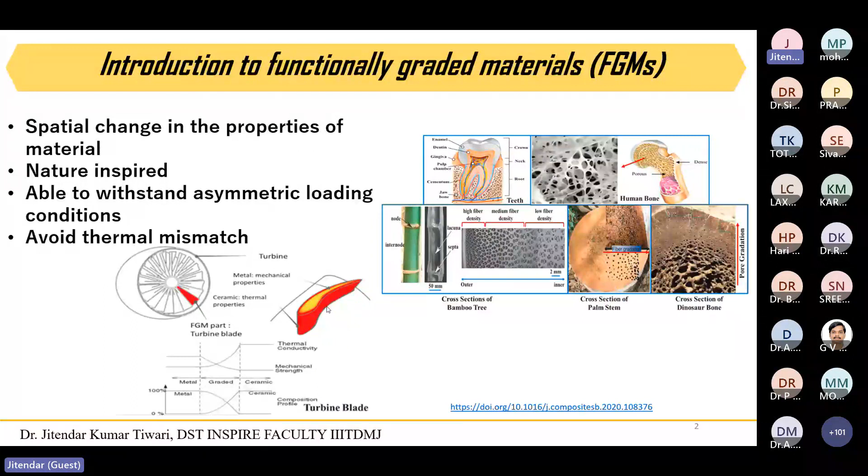Inside, most of the time, Inconel is very famous for turbine blades, and in the outer region we can add some kind of thermal barrier coating. Usually people use yttria-stabilized zirconia, which is very famous for thermal barrier coatings. So the thing is, how can we achieve the functional gradation in the case of the additive manufacturing process?

So that is very interesting as well as challenging for the research community. So there are three types of gradation we can achieve. The first one is porosity gradation, the second one is microstructure gradation, and the third one is composition gradation. So one by one I would like to discuss these in detail.

So these whole results which you are seeing are our work. We are working on all three types of gradation. So in the first case, if you see, in this direction the porosity is increasing. There are two types of porosity we can introduce. One is the design porosity.

So in our CAD model, as a micro lattice structure or any kind of design, we can modify, and we can even make closed cell porous structures, open cell porous structures, or partially closed or open. This kind of structure we can make with the help of CAD software, and then we can print it. But if we talk about the powder bed fusion process, if you print a closed cell structure, obviously the powder will get entrapped inside those pores. So laser powder bed fusion will not be feasible in that case. So that is also challenging.

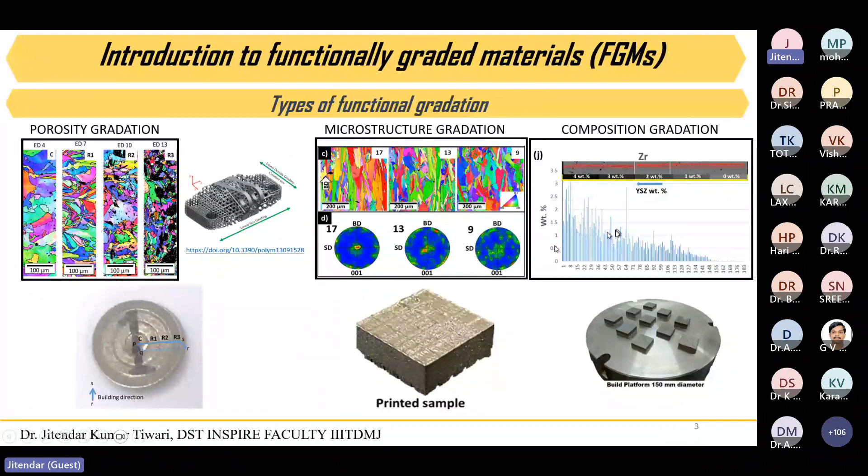So just one thing I would like to mention, most of the people are maybe not aware about that process. Apart from these processes, there is another process called electrochemical additive manufacturing. So additive manufacturing is nothing but the layer by layer guided deposition of the materials to make a 3D part. As of now, there are 7 fundamental AM processes, and they are categorized based on the amount of energy required for the fusion of the material.

But another one is electrochemical additive manufacturing. It's a very new process, and very few people are aware. At least very few groups are working in that direction. It's basically the electroplating process, but in case of electroplating, it's not guided material deposition. But in electrochemical additive manufacturing, this electroplating process is guided in such a way that we can create any kind of 2D design.

If you give it the CAD file, it can deposit the material, and maybe in 3 dimensions we can also deposit. But this process is quite slow. It's a very slow process. So one group at CSIR AMPRI Bhopal, Dr. Surender and Dr. N. Satish. Dr. N. Satish is my PhD supervisor. He was working on that when I was doing my PhD there. They started this particular work, and right now it is taking shape, and we are able to print a few bigger structures with that technique.

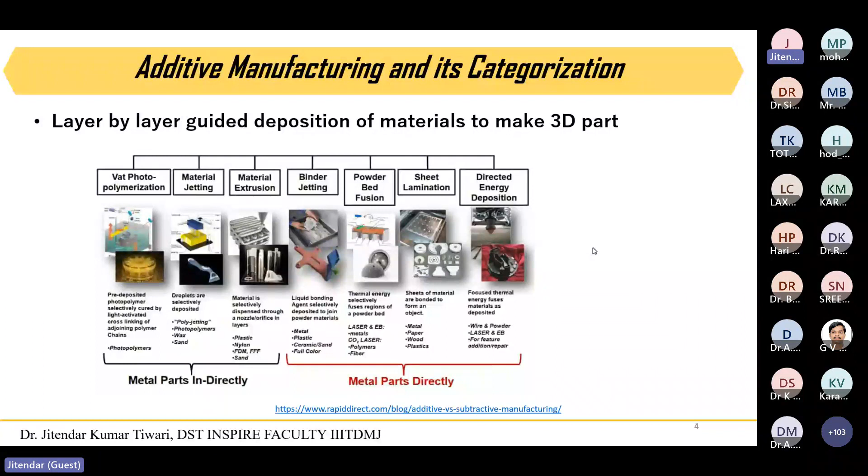So apart from this, I would like to mention the ice 3D printing process also. I think one group in IIT Bombay is working on cryogenic printing and manufacturing. That is also a new type of AM process. Laser powder bed fusion, everybody is already aware of this process, so I will not go into detail. I will just come back to how we can utilize this process to develop innovative or engineered microstructure.

So this is basically the functionally graded Inconel 718, and this is not actually straightforward. We cannot say it's functionally graded, but it is actually engineered microstructure with the help of an element-based approach. So let's say you have a part, and that part is experiencing different kinds of loading at different locations. This element-based approach can help to develop a microstructure based on your requirements.

As in my previous slides, I already mentioned this sample. I would like to briefly explain how we printed it. We make one matrix containing 5 values of laser power and scanning speed, and based on this combination we are able to calculate the laser energy density. In this direction LED is almost constant, and in this diagonal, the laser energy density is increasing.

So Dr. Pradeep, if there is any interruption from my side, please just call or stop me there. I hope everything is going well. Can you please confirm? Hello. Anyone please confirm that everything is going well? Yes, sir. Hello, sir. I can hear you. Okay. So my voice and everything is going well? Yes, sir. It's audible. Okay. Fine.

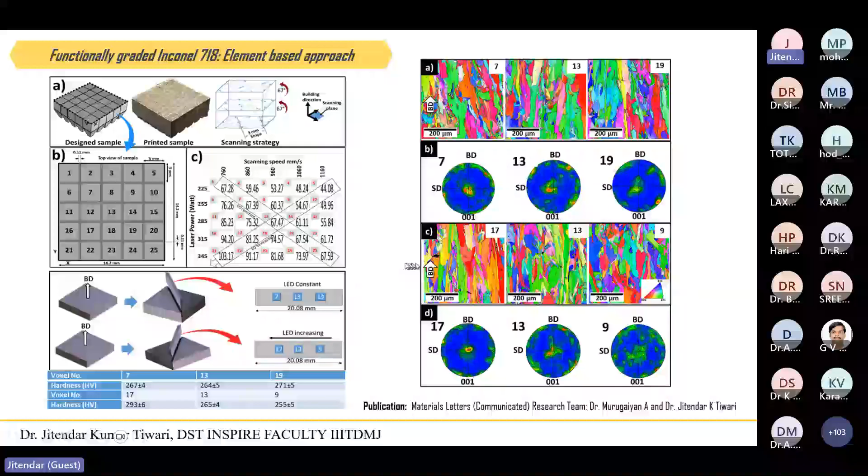Anyways, so just come back to this work. So why this work I'm planning to do, why it's still going on, a lot of investigation, and I'm trying to extend this work at the... we had tried with the powder bed fusion process. A few people have done this kind of work with directed energy deposition. Obviously, directed energy deposition is a very suitable process for functionally graded material, because you have a lot of freedom to supply the material there in powder form or in wire form.

Okay, but we had tried with the powder bed fusion, because in case of powder bed fusion, the melting happens in a very small region. If you talk about the melt pool size in case of the LPBF process, it's around, I would say, 100 micron or 150 micron. In that range you can get the melt pool size. So there the problem of agglomeration is always there.

But here we can avoid these kinds of problems, because everything is in moving condition. So some bounce back phenomena can happen, and your reinforcement could not be properly distributed inside the matrix material. So these kinds of problems are associated with the LDED process. So that's why we should choose LPBF, and we should try some innovative work with LPBF. Still, in India no commercial machine is available for functionally graded material development using LPBF.

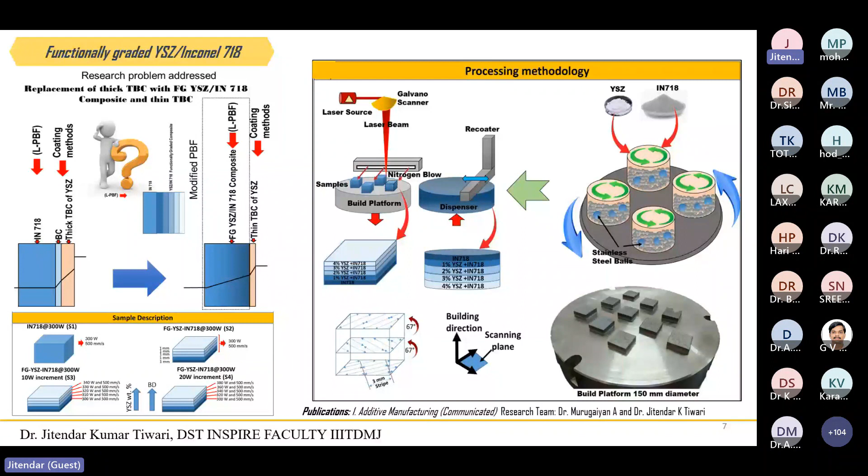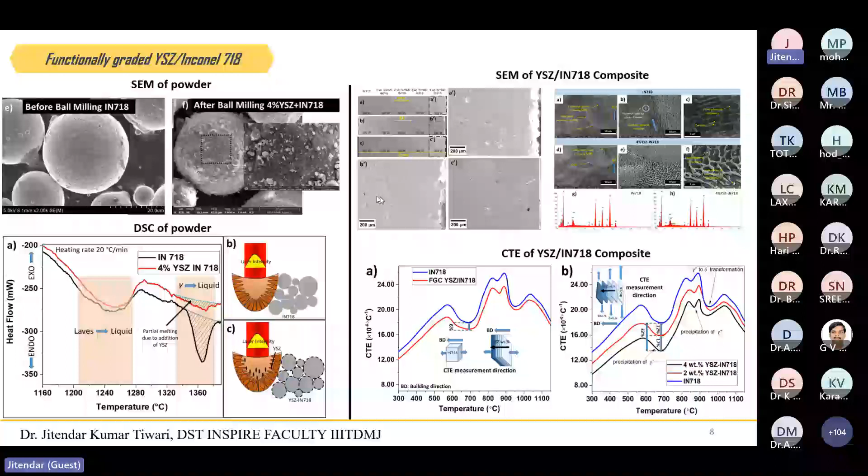So graded porosity case, the second one. Like I mentioned already in the initial slides, there are 3 types of pores. So lack of fusion pores, if you have less energy density, and once you increase it, obviously evaporation pressure will be developed above the melt pool, and that can result in keyhole porosity. In general, the shape of keyhole porosity is spherical.

So that can be useful in one sense, but obviously you are increasing the energy density, you are spending a lot of energy there. That will be costly if you want to make any kind of consolidated porosity. But for dedicated applications, we can target this, no problem with that. So I hope you understood how we have achieved this kind of consolidation in porosity.

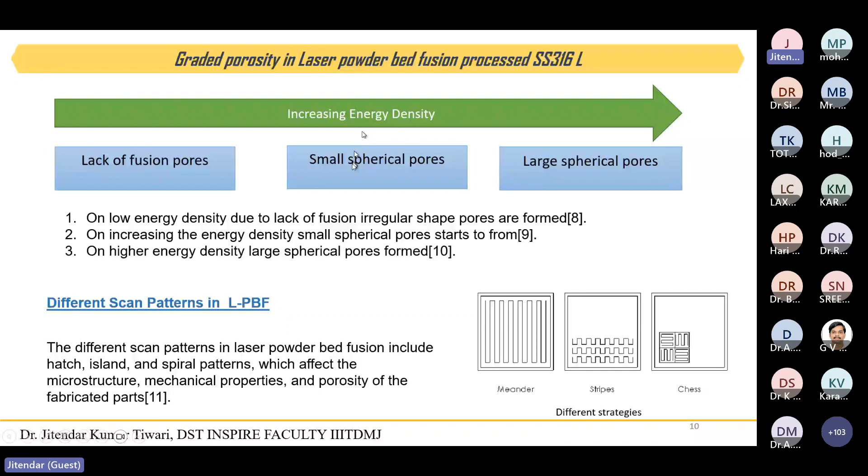Why I'm targeting this particular thing: in LPBF, if you want to make closed cell pores, it's impossible, because during closed cell printing, let's say we are printing a closed sphere, once you print it, the whole powder will get entrapped inside that sphere. That is the problem. So to avoid that problem, we can utilize these spherical pores or keyhole pores as porosity, and we can achieve functionally graded porosity.

So again, it will be some kind of parametric investigation you need to do, and you have to identify at what energy density combination how much porosity you are achieving, and that's how you can play with the parameters and plan your experiment according to your need. So these particular things also can be extended.

So you can see these are the concentric discs. Each disc is printed at different parameters which have been selected with this process parameter window. So that is also a very novel experiment, and I think very few people have performed this kind of experiment till now, and maybe in future we can target the extended version of it. Okay, so some of the results are here. Anybody want to discuss more about this work? Maybe later on we can catch up.

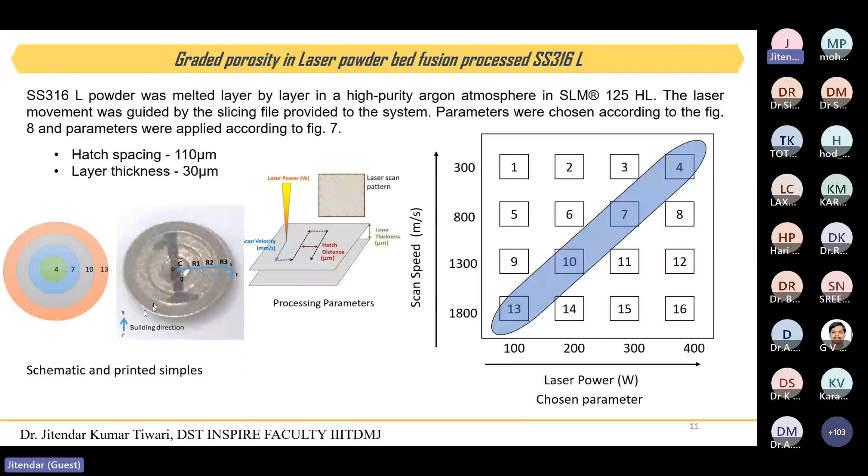So again, the problem I was mentioning again and again is how you are going to enable the laser powder bed fusion process for consolidated materials. Currently there are two types of powder supply systems in the market. One is gravity based supply. Renishaw is using this kind of system, and I think other machines like EOS also have similar things. I'm not sure, but Renishaw has this gravity based powder supply system, and then there is dispenser based supply.

So this iFusion SF1 from Intech, sorry, uses this dispenser based supply. Intech collaborated with DMG Mori, and they have developed a very nice system. I was in charge of that system in IIT Madras, and I have used it extensively for larger components as well as small scale components and innovative material design. So I found that system is quite good.

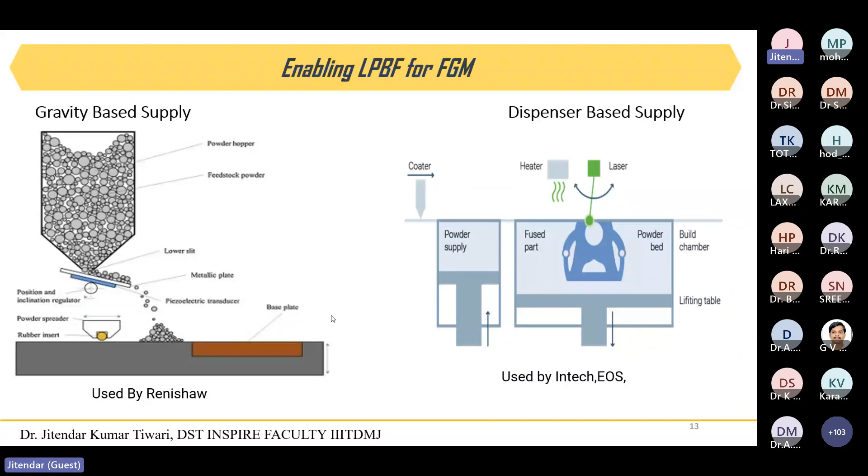So these two kinds of powder supply systems are already there, but are they going to solve this problem for the development of consolidated materials? No. So that's why we need some kind of innovation and thought process here. And still, it's very challenging even to develop this normal powder supply system. At Intech, I saw they're very hardworking, and getting to that level is itself a challenging task. But maybe in future you can think in that direction. We can expect some updates on the LPBF system from Intech.

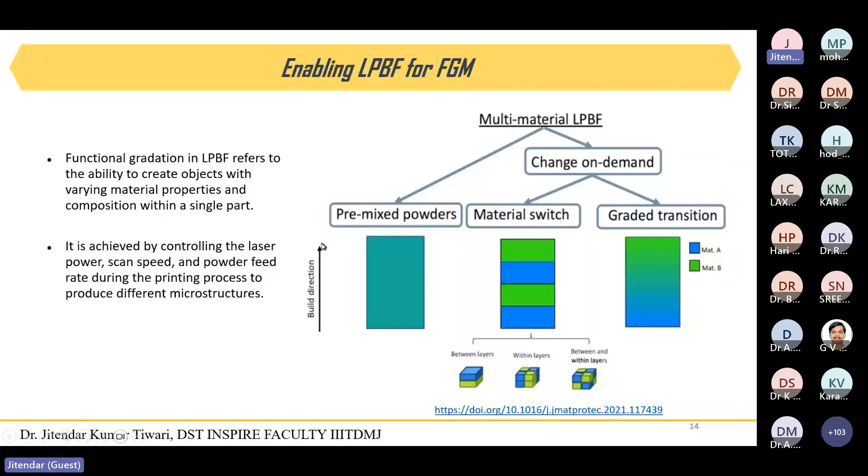They have already patented this powder supply system. Okay, so this graded transition. Our target is to achieve this graded transition. So to solve this problem, we have printed with the help of FDM. We have printed one prototype.

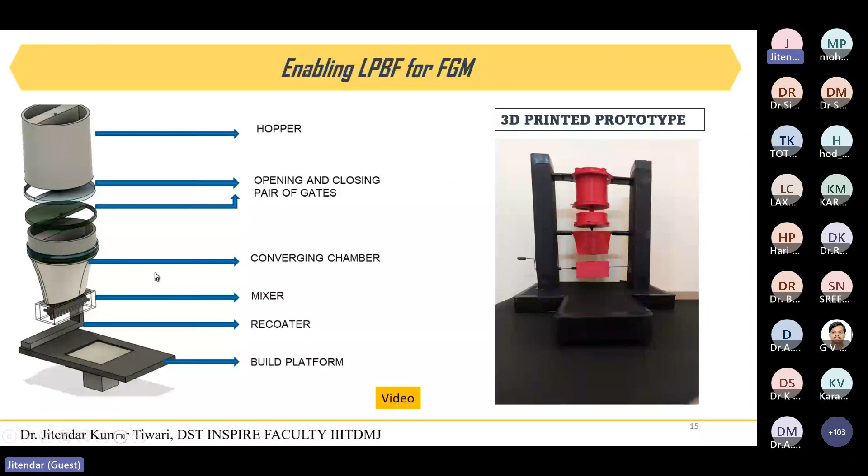This whole work is performed by my students, and they have actually designed this particular CAD file they have first developed. And here I would like to just share a few important things of this work, and we are actually writing one project on this particular thing.

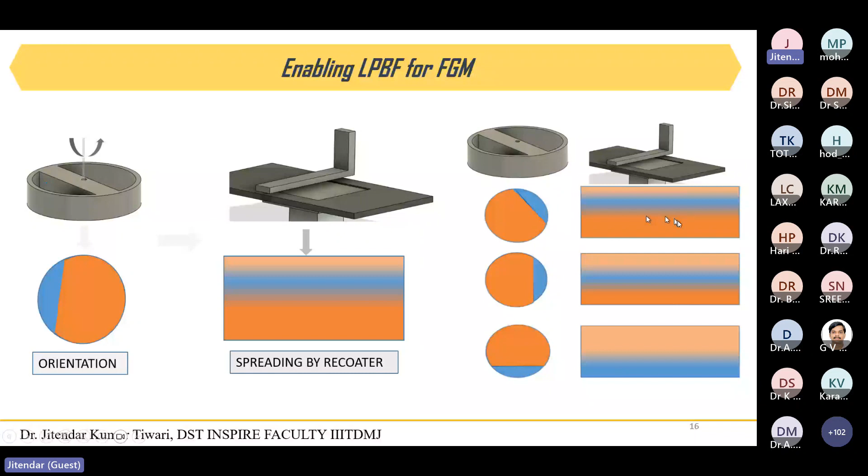The thing is, the innovative part is that if we fill this chamber with different composition, and we rotate it at a particular angle, we are able to achieve the different composition on the build platform. And that's how, when we stack these layers in 3 dimensions, we are able to achieve this kind of gradation. With this particular approach, we can target the 1-dimensional gradient as well as the 2-dimensional gradient.

And the third problem, which is 3-dimensional gradient, is still open for everyone. If anyone has an idea, they can discuss with me. I'm open to it. Just try to think in that direction, how we can achieve the 3-dimensional gradation in LPBF during the powder supply. Hopefully this Aerosint can solve this problem in the future, and they might have developed it, but still, it's restricted to the material and this graded region.

The main problem is this graded region, what kind of process parameters you have to find out. Okay, so it is not a very easy task to just take multiple materials and try to print them in a functional way. Apart from this system development, it needs a lot of metallurgical investigation to make these kinds of functional materials. So it should have some kind of metallurgical compatibility.

Let's say if you are mixing one material into another, the fraction of, let's say, iron is increasing, and it is resulting in a deteriorating phase in the other material. Obviously you will end up with cracks and very poor properties. So again, it's a very challenging task, and it needs a lot of investigation before printing, or before we say that yes, this is the material I can print. You cannot say that straightforwardly. Before that, you have to provide a lot of documentation on the material aspect.

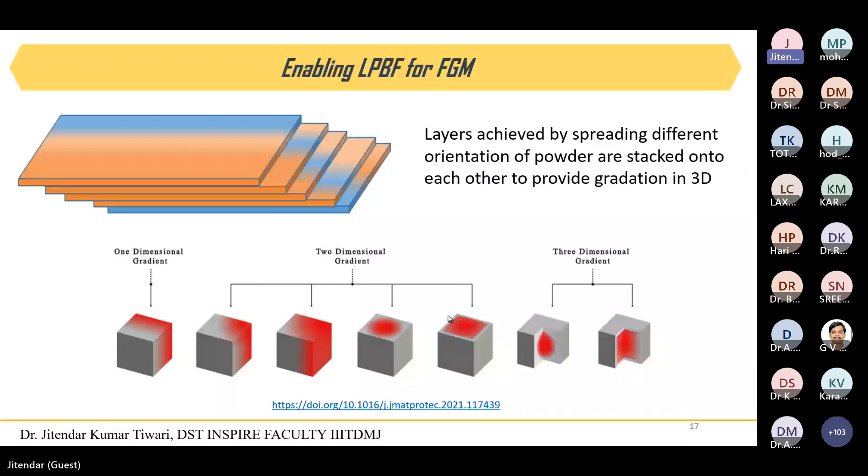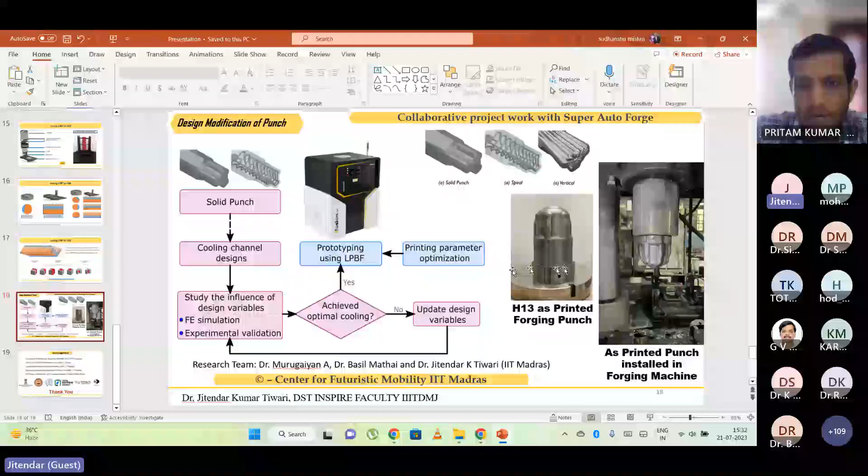Sir, in this slide, I'm looking into this FE simulation and influence of design variables. Can you give some insights into this block, sir? Okay, design variables: basically, this punch is experiencing the loads also. So our design should be such that it should not affect its mechanical property. It should be able to bear these loads which have been applied on this punch. So when we are planning to introduce some conformal cooling channels inside it, we can play with

the diameter. What should be the diameter of these things? And whether it should be vertical in this way, or spiral, or any other kind of approach we can do. So those are basically the design variables. The FE simulation part was performed by Dr. Basil; the printing and designing part was taken care of by me. But still, with the help of FE simulation, we can identify what kind of loading it is experiencing after introducing these channels, and whether we should remove material or add material.

Has this work been published? No, it's actually not published. It's a company work, so we don't even have the data for their testing, but they have tested it. Actually the companies are not very much interested in publications. They just want to solve their problem. And then I came back here to IIITDM Jabalpur; otherwise we could publish this work, but still it's under process and it's going on.

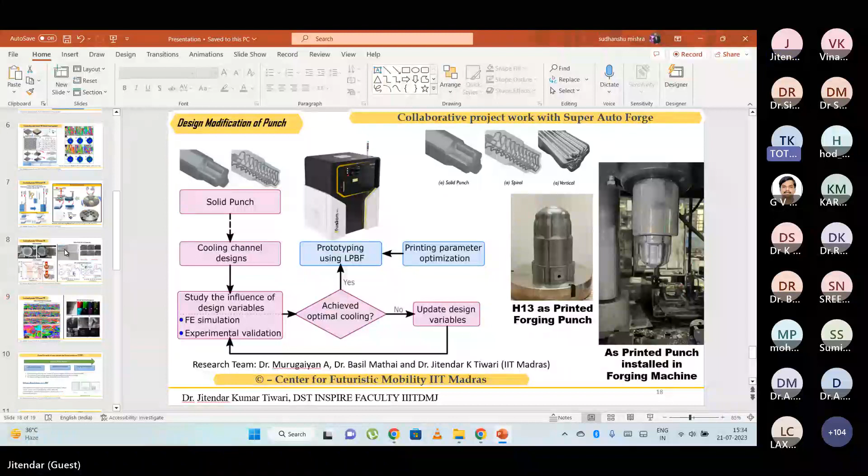Okay, sir. My second question is related to element-based additive manufacturing. Can you go to that slide? Maybe it's slide number 3 or 4. Slide number 6. Yes, this is the element-based approach. Are you able to see it? Yes, sir. So my question is, suppose I'm assuming these elements 1 to 25 are a space where we have to deposit material, which consists of 25 blocks.

Let us assume I have multi-material of two types, and I want to deposit these two materials in different locations, not uniformly spaced. Maybe 10 blocks have one material and another 15 blocks have the other material, spaced in a different pattern. Will it be possible? Yes, it will be possible. Definitely, if we have a multi-material system, if you are able to spread the multi-metal powder on the build platform, you can achieve it. There is no problem, and you can even play with the parameters as well.

Obviously if you have that kind of setup. But still, in India, to my knowledge, we don't have any machine capable of multi-material printing. There are a few companies working in that direction, and maybe soon we will have it somewhere.